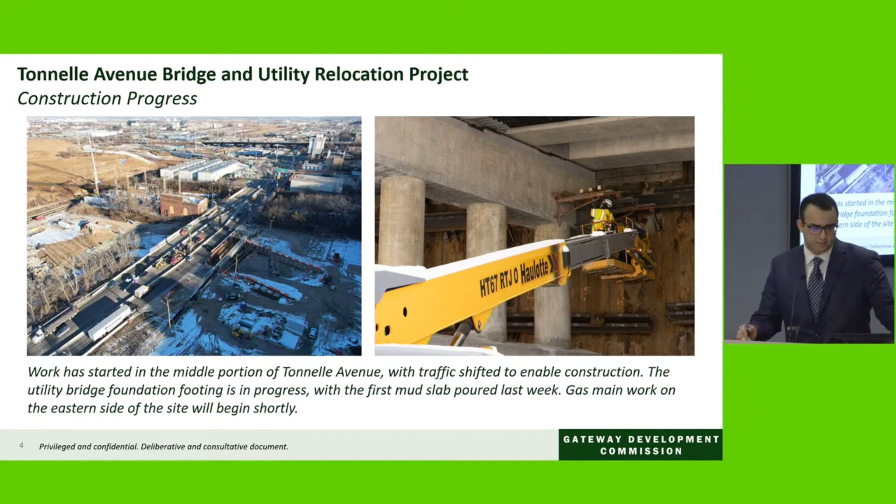On the Hudson Yards HYCC3, we also have good progress ahead. The last of the secant piles was installed. For the next year and a half, the project will be focusing on excavation of the structure. We are doing load transfer of the existing Highline to the newly poured concrete beams. Within the excavation area, we have started excavation on level 1. Level 1 we don't have any water. When it gets to level 2, we have to do a lot of dewatering. Good progress. The goal is to finish the project on November 17 of 2026, and to date soil disposal has been around 25,000 tons.

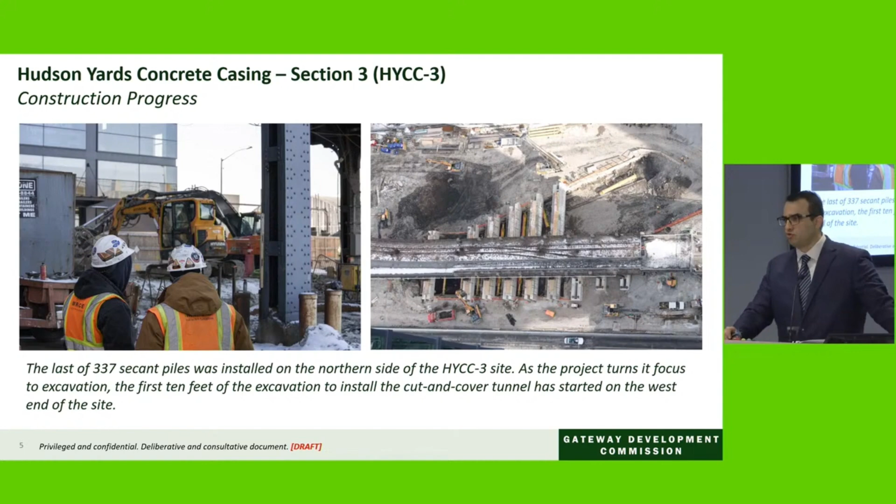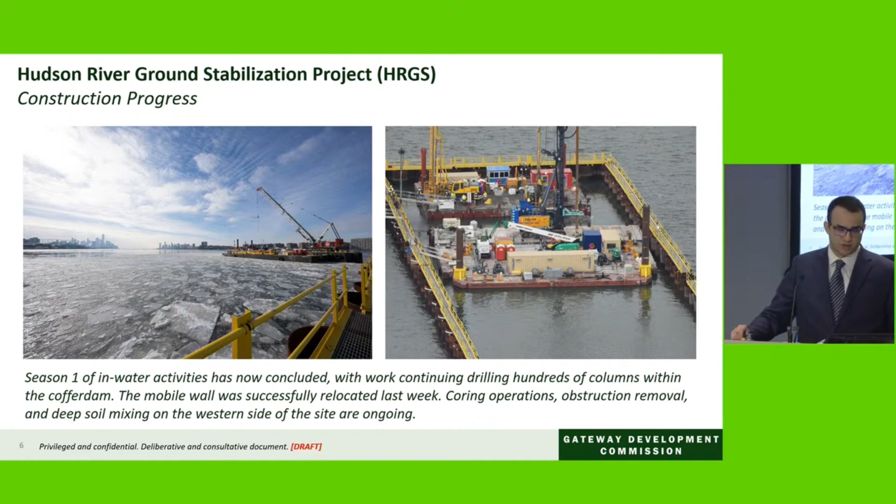On the Hudson River ground stabilization, season 1 of in-water activities has concluded. What we're doing right now is we have moved the mobile wall within the first 600 feet. Within this contained area, we are doing primary and secondary deep soil mixing columns. This season runs from when the fish moratorium started on January 20th and will continue until July 1st. Within this time period, inside the enclosed containment, we're going to do about 400 primary columns and 350 secondary columns. As we go, we're doing some obstruction removals. We're finishing the coring for the test section to come up with the mix design. This week we're coming up with our permanent mix design for the deep soil mixing.

On the Palisades Tunnel project, we're doing preparatory work in progress, which is erosion control, rock and environmental borings, and clearing. We're also doing instrumentation installation and monitoring. As of today's schedule, the TBMs have been ordered.

TBM number 1 is well ahead of schedule, ready to be here in January 2026 and ready for excavation in May of 2026. The second TBM is to arrive in March and ready for excavation in June of 2026. So a great partnership there with our partner, and on schedule.

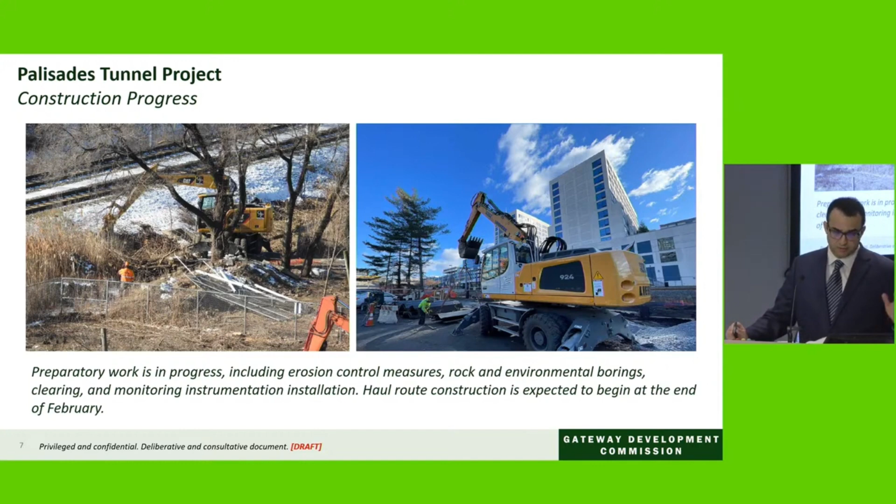Now I want to get into today's agenda, which hopefully includes you guys approving the Manhattan Tunnel project. Before that, I want to give an introduction. This is the most exciting and challenging contract that we're going to have. Just an overview of what we're doing there.

This is roughly 700 feet of tunnel at 30th Street in Manhattan. It serves two purposes. First, to clear any obstruction from about 200 feet west of the historical Manhattan bulkhead up to the 12th Avenue shaft, for the future TBMs coming to this shaft. This shaft will later become a permanent structure in our package 2 for a ventilation facility. So clearing obstructions within the route is the purpose of this first section.

The second section goes east of that shaft, breaking into the HYCC contract. That's a permanent structure. This project is design-build, and to accommodate the complex tunneling activities, we went through an ATC process, which helped the selected preferred bidder propose an alternative technical concept. They came up with eliminating a shaft, minimizing impacts on surface roads and sidewalks, and replacing the sequential excavation method with a more advanced shield digging operation, which saved us a lot of time on the schedule.

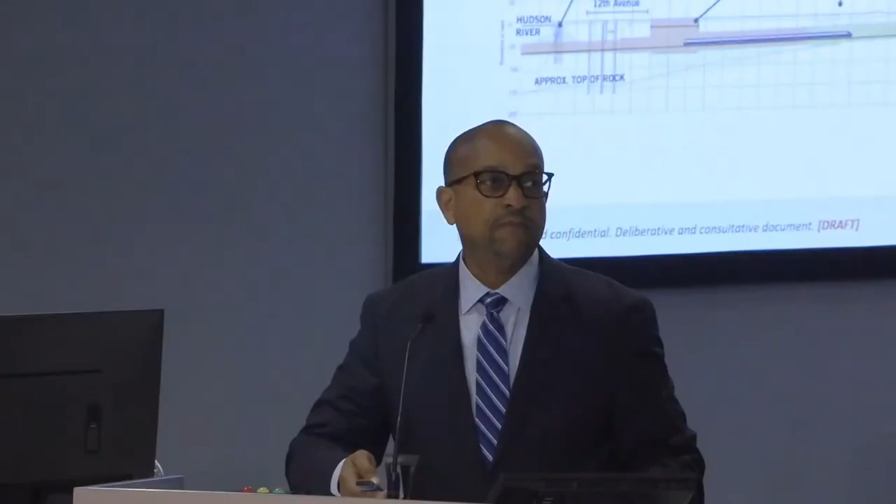We've been in the procurement process for a while, and I'm pleased to present today a recommendation for award. Very briefly, three shortlisted firms provided proposals. They were reviewed by an evaluation panel consisting of technical experts from Gateway, the State of New York, New Jersey Transit, the Port Authority of New York and New Jersey, and Amtrak.

Unanimously, the joint venture Frontier Kemper and Perini was selected through the procurement process. Today we're recommending a full contract award of $1,177,700,000, along with the market case estimate that'll be discussed or provided a little later, which followed the PDA guidelines. Also, a recommendation today is that we simultaneously approve our CEO's ability to issue a notice to proceed upon your approval.

Thank you. And I think next up is Tom. Can we, just to interrupt for a second, there was a slide, I believe, that was not discussed in the presentation prior to yours that I think is pretty illuminating for both the commissioners and people in the audience with respect to exactly what's going to be happening here.

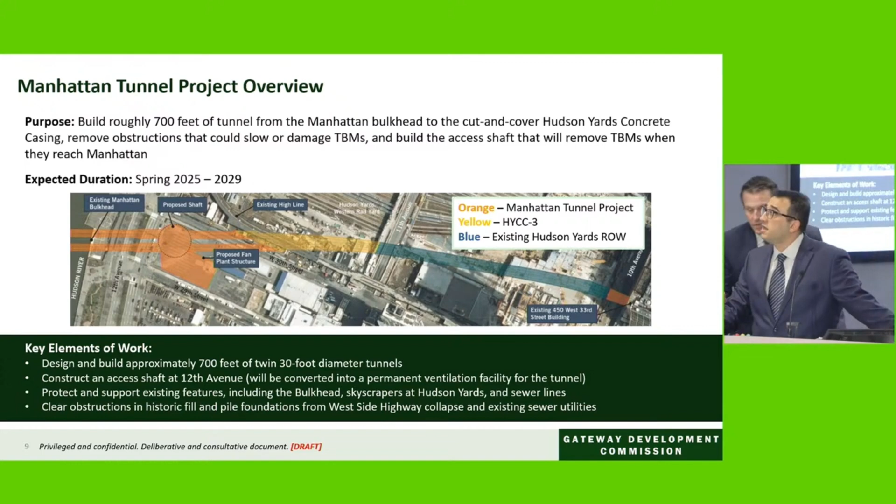As you see, you've got the Manhattan bulkhead, historical, that's basically on piles. We have to clear the piles and do a load transfer from the piles up to the tunnel we're going to make. As you see, the gray line on 12th Avenue represents existing structures, and there could be older existing piles for the highway, plus piles supporting two sewer structures on 12th Avenue.

Because the TBMs are going to be running through this alignment, we have to clear obstructions, since the TBM can't cut through steel or wood. To clear that, you have to actually do a sequential excavation method, or what the preferred bidder proposed: shield methoding to protect it and clear the obstruction.

So everybody asks, what happens to the loads? The loads will be transferred to the roof of the newly built tunnel. Once we clear the obstruction into 12th Avenue, this will be backfilled for the TBM, using low-strength material concrete, and the TBMs will be able to excavate through the 12th Avenue shaft and be demobilized from the shaft.

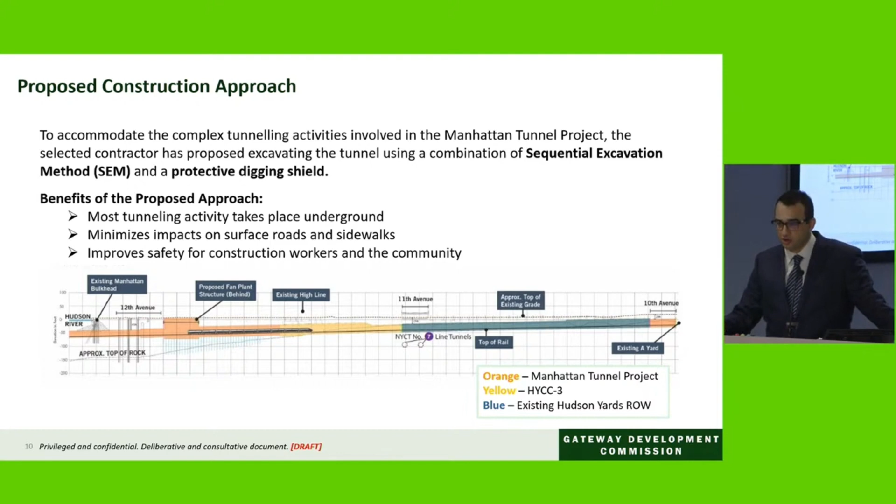Commissioner, did I answer all your questions? Any other questions? It certainly was more illuminating. No problem. Thank you. I know the staff has been working on this incredibly hard, and the ATC has obviously been a huge addition to saving time on the schedule, so thank you. Are there any other commissioners who wanted to ask questions at this point? Okay, thank you. So we can continue the presentation. Thank you.